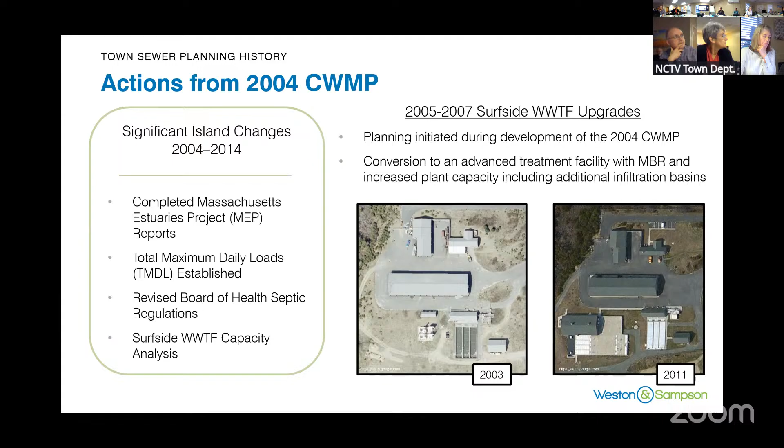So then, based on the results of the MEP, the town went ahead and did a 2014 update to the CWMP, and several modifications were made to these areas. For instance, Hummock North was added as a needs area, Hummock South was added as a needs area, and Miacomet was added as a needs area. That's because the MEP identified nutrient loadings to the ponds, Hummock Pond and Miacomet Pond.

And then, because we had the additional flows, the other change was Madaket. In 2004, the plan was to treat Madaket wastewater at a third wastewater treatment plant. In 2014, the town decided to remove that treatment plant and bring the flows to the Surfside plant instead, so the Surfside plant required an upgrade for the additional flow.

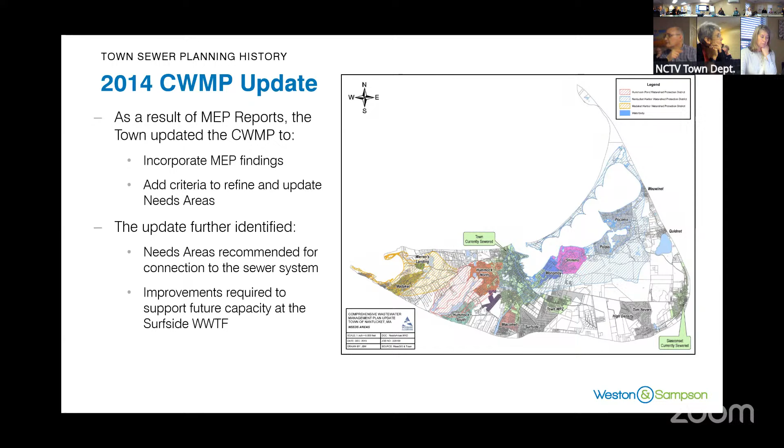Which leads us to our actions.

One of the projects we did was the Nantucket Harbor Shimmo Plus project. That was your first CWMP needs area that got sewer extension. First and only, actually, because no other areas have been serviced yet. That was our first large scale project since the late 80s when we did the Surfside Road area.

Then the bottom left hand side, that was phase one upgrade to the treatment plant. This was the upgrade based upon the CWMP, where we added all those needs areas into the plant. It got updated for the additional flows.

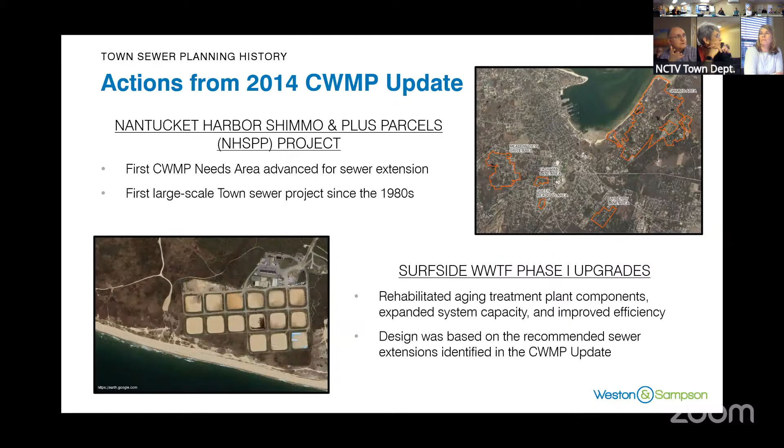The next planning project was the 2020 sewer master plan. We presented this to you folks, and the purpose of the master plan was to identify how and where to connect these needs areas into the collection system. That's a very important step because you need to build the downstream system in order to build the remainder of the system. So we looked at how to connect each of these needs areas into the existing collection system.

Which leads us to the first project that was done, the Surfside Road area sewer improvement project. We have the new pump station that was built, replacing the old 30-year-old station across the street. It's a much larger pump station, but it's basically sized to handle Somerset, Hummock North, and Hummock South. Somerset was the first project to be built, and then we'll follow on with the two Hummocks, North and South. Those flow into Somerset, which then pumps into this pump station, and then to the treatment plant.

So the next action from the sewer master plan was to refine the design that was conceptual in the 2020 sewer master plan. The first needs area that was looked into was the Madaket and Warren's Landing needs areas. This was a priority due to its proximity to Madaket Harbor and to Long Pond. As part of this process, the design of low pressure sewer was verified and some preliminary pipe sizing was completed, as well as looking at different pump station considerations and conveyance options into the existing sewer. From all of that refined design, a budgeted cost was developed for this area.

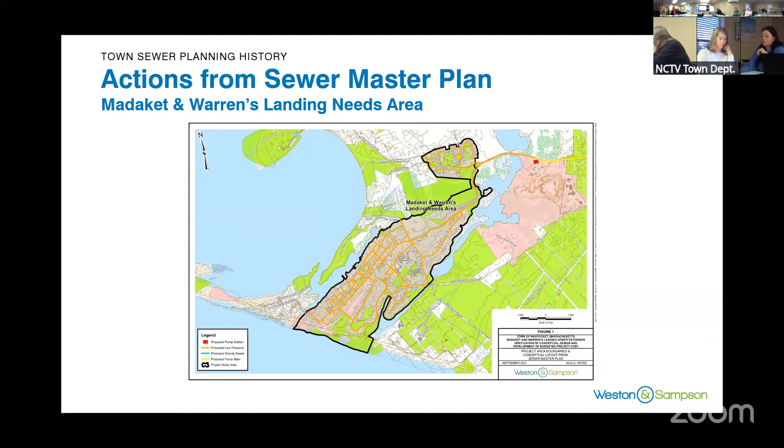After some public outreach efforts during this reporting process, the town decided to shift focus to another needs area to do a similar analysis, and that was the Somerset needs area. This area was chosen as a priority due to being within both the Hummock Pond and Miacomet Pond watersheds, which are both impaired waters, as determined in the 2014 CWMP update. This was completed back in 2023. This needs area needs to be constructed before both the Hummock North and Hummock South needs areas. A budgeted cost was also developed for this needs area at the time.

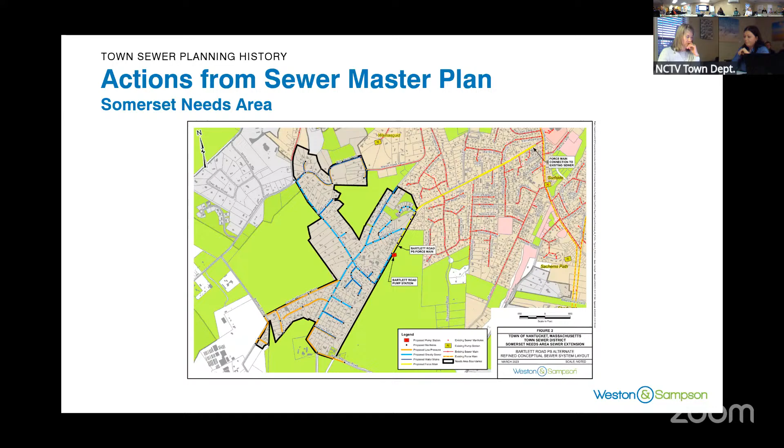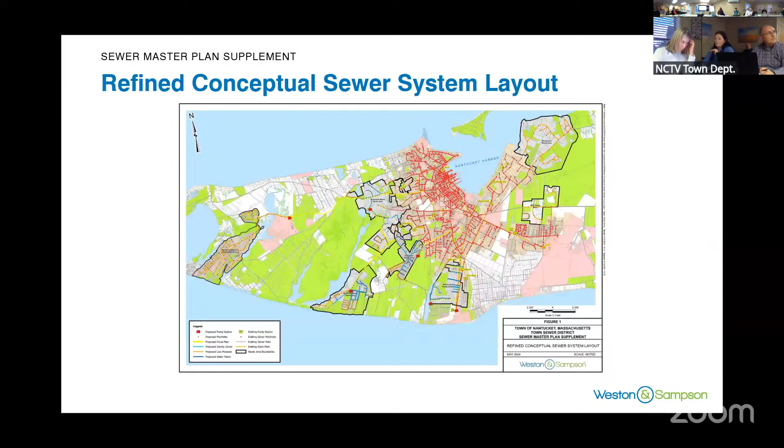Moving from 2023 into 2024, we began discussion of the sewer master plan supplement. After the individual analysis of Madaket and Somerset, the town decided to go through that same similar analysis of verifying conceptual design and developing budgeted costs for the remaining needs areas. That includes Hummock North and Hummock South, as well as Shimmo, Miacomet, and WPZ. I'll briefly touch on each of those needs areas next.

This is a map of the Hummock North needs area. This area is directly adjacent to the head of Hummock Pond, and the majority of the area is within the Hummock Pond watershed. It consists of gravity sewer, low pressure sewer, one pump station, and a force main that conveys flow from the entire area into the proposed sewer in Somerset. So Somerset needs to be constructed first, so these flows can be discharged into the existing sewer system and get treated at the Surfside wastewater treatment facility.

Something to note for this area: at the bottom of the map, there is low pressure sewer proposed and the future Hummock South force main proposed. Something recommended in this report is for those two pipes to go in the ground at the same time, depending on which needs area you construct first, just to save some final paving costs.

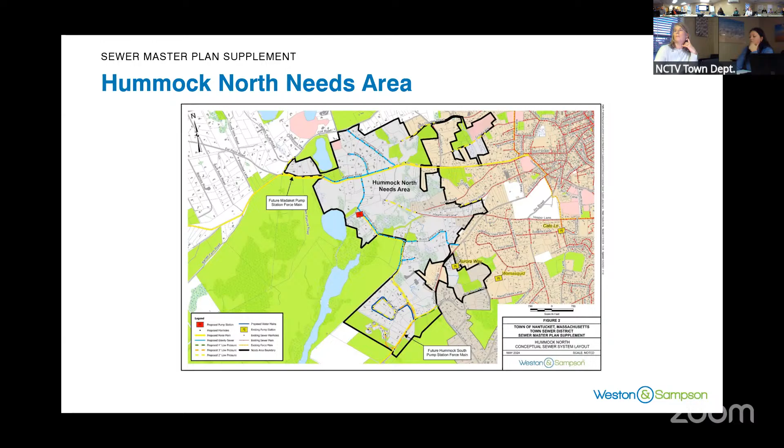So next is the Hummock South needs area. This needs area is similar to Hummock North in that it's directly adjacent to Hummock Pond. The majority is in the Hummock Pond watershed, which is why it was included in the 2014 CWMP and the sewer master plan. It also consists of gravity sewer, low pressure sewer, one pump station, and a force main that discharges into the proposed sewers in Somerset. So Somerset also has to be constructed before this area can be constructed.

Something to note on this is there's a lot of dark blue lines on this map. Those show proposed water mains. While working on this report, we were in discussions with the Nantucket Water Department, and it was decided for this report to propose water mains on any streets within needs areas that don't currently have water mains, to save on possible final paving costs in the future.

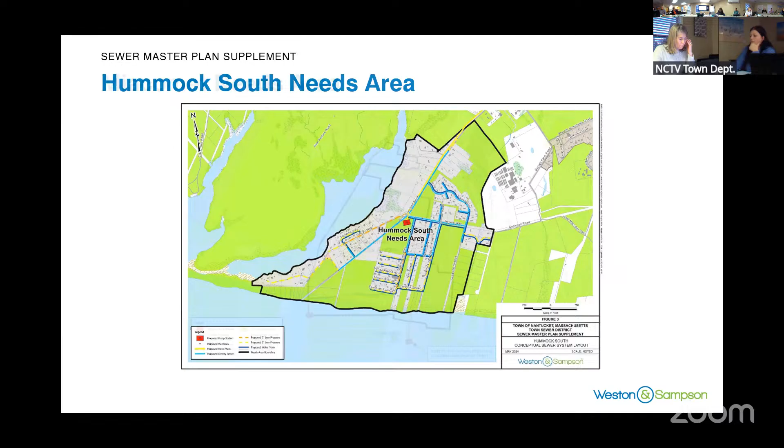Next is the Miacomet needs area. This area was added in the 2014 CWMP due to it being directly adjacent to Miacomet Pond, another impaired water body. This area consists of primarily gravity sewers, with just a few low pressure pieces on Miacomet Road.

Back when the force main was being constructed, it was decided to also construct gravity sewer on South Shore Road. So that used to be included on this map, but now it is existing sewer. There's currently a dry line in the ground, which was done to only pave South Shore Road once. So that line is ready to take in the sewers from this area.

The South Shore Road pump station, which is at the south side of this map, right next to the Surfside wastewater treatment facility, is already in the design phase and is proposed to be installed under a separate project that is going to take in flows from this area.

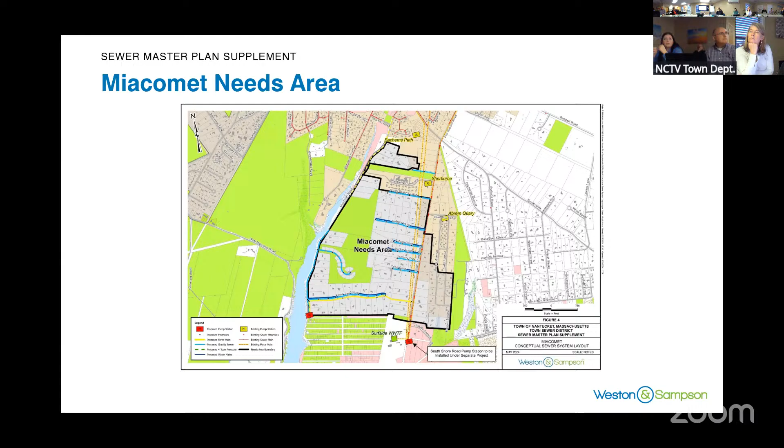The last of the 5 needs areas evaluated as part of this supplement was the Wellhead Protection Zone, or WPZ, needs area. This needs area is tributary to the town's drinking wells. Originally in the 2014 CWMP update, this needs area was shown to be adequately treated just with on-site wastewater or with a septic management plan.

But the CWMP update recommended that if there was ever an issue with nitrogen or other contaminants in drinking water, this would become a recommended sewer area. That's why it was shown for conceptual design in both the sewer master plan and then refined in the supplement. This area is also completely low pressure and has 2 discharge points, one on Hinsdale Road and one on Belvedere Farm Road.

So building on protecting the drinking water on the island, an additional analysis completed as part of the sewer master plan supplement, which wasn't included in the sewer master plan, is the Zone 2 wellhead protection area. The goal of this analysis was to look at the wellhead protection area, outlined in pink on this map, look at all the parcels within this area, see which parcels are sewered, which ones aren't, and see what would need to be done to sewer all the parcels in this area to try to eliminate any septic derived nutrients in the drinking water.

Throughout this analysis, it was concluded that there are over 700 parcels in this area that are currently fronted by sewer, but they're not paying a sewer bill as of December 2023 when this analysis was conducted. So it was concluded that they are not connected. This analysis will have to be rerun since this was done in 2023, and then we can look at the different reasons why each parcel is not connected.

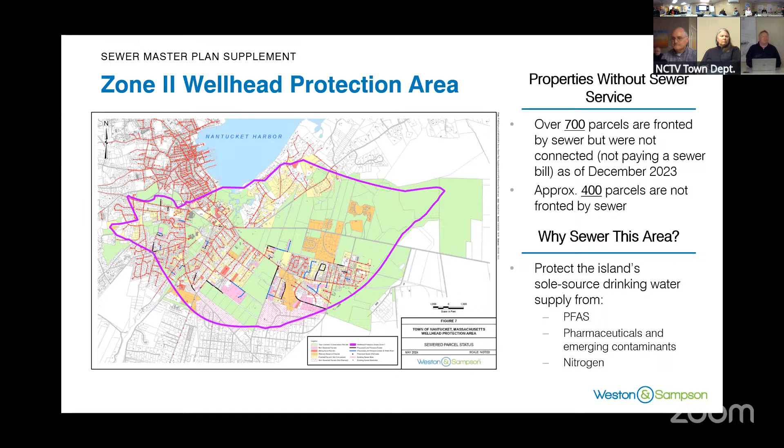This summary shows the budgeted cost developed as part of the sewer master plan supplement for each individual area. The Madaket report was done in 2021 and the Somerset report in 2023. As part of this report, we brought those costs up to 2024 dollars to be consistent with the rest of the needs areas, and for consistency in what we've been presenting to you, the Somerset costs are shown from July 2025.

Something else to note is, as I discussed with the water mains in all these needs areas, they were proposed in all streets in the needs areas that don't currently have water mains, and the cost for those water mains is included in the total cost. So you see how Hummock South is quite large - there are a lot of water mains proposed in that area, and that is where some of that cost comes from.

Now I'm going to hand it over to Kent, who's going to talk about a funding option that was looked into as part of the sewer master plan supplement.

One specific thing we left in the scope when we did the sewer master plan supplement was looking at funding, because funding is always a challenge. It's been a challenge for wastewater projects across the state forever, so it's not new just in Nantucket.

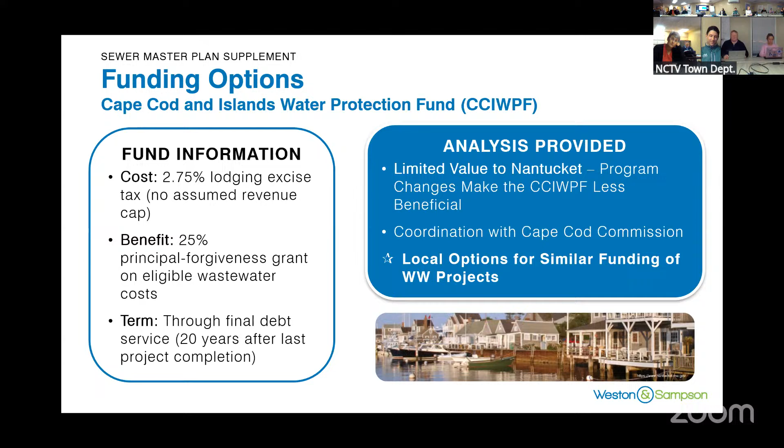So I think, Anna, that was all we had for this discussion for now. We actually designed in a break here because we're going to jump away from the history of the sewer project and where we were, to some of the questions that came up in the last discussion on Nantucket. So we thought this would be a good time to think about what we presented and get back to questions on that.

It was so close, the vote split, I think one vote was positive. It was rejected at the ballot. Yeah, it didn't pass, it didn't get the required votes. As far as I know, the community in Nantucket is still well opposed to what they perceive to be the negative impacts on development should they be sewered.

And then we also have issues around the risk to the infrastructure over time. Nantucket now has some different conditions. For one thing, the cost of the project at that time, 2016-ish, was higher than it ended up ultimately being. And the land where we were going to put the treatment plant is now not owned by us. That went out the window in 2014.

I think Dan and Anna did a pretty good job summarizing some of the previous sewer planning efforts for the town, but I believe pretty much the results of those sewer planning efforts have all corroborated the need for sewers in response to some of the environmental impacts that have been identified in these areas. These are specific to Nantucket's regional environmental impacts, similar to Cape Cod.

Dan touched upon some of the previous projects that have been done. The Shimmo project was the first sewer extension project since the 80s. Then the subsequent projects, the Sea Street pump station, actually set up some of the infrastructure necessary for the next needs areas to be implemented into the sewer system.

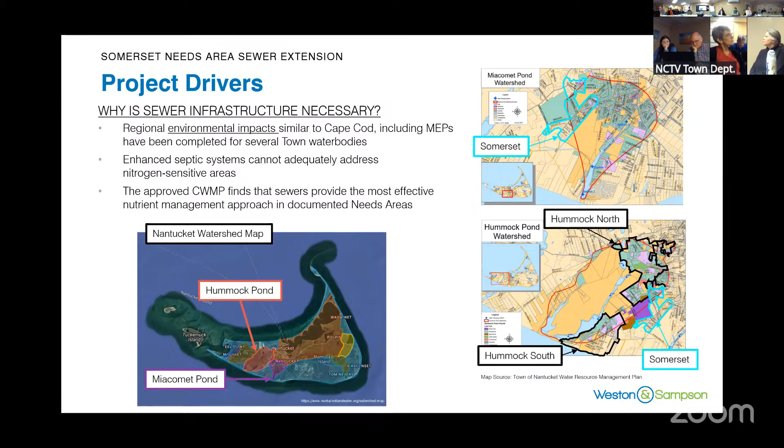The Somerset needs area lies between the Miacomet watershed and Miacomet Pond watershed and the Hummock Pond watershed. The CWMP finds that providing sewers to these areas is the most effective effort to manage nutrients in the area, as documented in the needs areas.

So really, what are the environmental benefits of the sewers? As I mentioned before, the Somerset project area lies between the Hummock Pond watershed and the Miacomet Pond watershed. The MEP monitoring shows that nutrient-driven habitat degradation is really coming from a lot of the septic systems in the area. It's the primary source of the nutrients to these ponds.

As you can see in these pictures of the Hummock Pond and Miacomet Pond, this is just a few pictures of eutrophication and algae in the area. Other items that have been identified are harmful algal blooms, turbidity, and oxygen depletion. Providing sewers to the needs areas will eliminate these septic-derived nutrient inputs throughout the areas.

One big thing to consider is it also removes any PFAS, pharmaceuticals, and other emerging contaminants that are identified in septic systems, really improving the water quality from these areas and reducing the degradation of these ponds.

One question that had been brought up in one of the previous meetings was the need for septic systems in the area and what type of septic system was necessary, specifically the need for a conventional system versus an innovative advanced system.

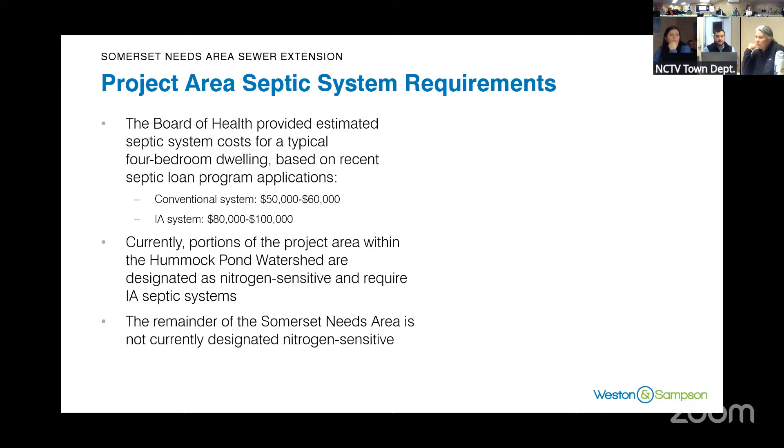In discussions with the Board of Health, we did some research to determine what costs would be for these types of systems. The Board of Health and Wannacomet Water, with Mark Willett, identified average costs of $50,000 to $60,000 for a conventional system, and $80,000 to $100,000 for an IA system.

One option, if you want to click next: the Bartlett Road pump station site currently has a septic system that's in failure. I know people have brought up what we can do to utilize that site in the meantime. Currently there's limited space at that site, and it prevents simultaneous installation of a septic system as well as the pump station there.

The pump station has to go on top of where the septic system is now. Any new septic system installed at that site would essentially need to be removed when the pump station gets constructed, and there would be a temporary loss of wastewater service during construction.

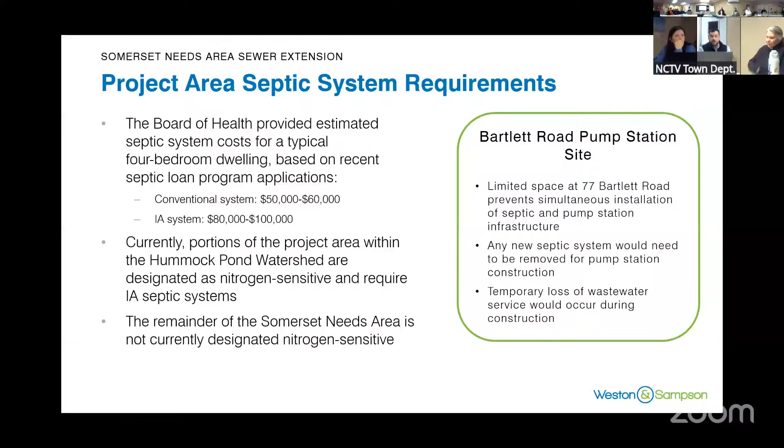Another topic that has been brought up is the potential to split the Somerset project between phases. Looking at it, the logical approach would be to split it into two different phases. Phase one would consist of construction of a pump station, as well as gravity sewers and force mains along Somerset, Bartlett, and Raceway.

This is essentially where all of the roadway improvements are going, the stormwater improvements, and where the force mains are going. Phase two would involve sewer extensions of the remaining streets in the Somerset area.

Now, while this sounds like a good idea, it really isn't recommended. We've touched upon the SRF considerations in the past—really the uncertainty with statewide SRF funding as you move forward, with delays of the project. The anticipated costs and timing delays are pretty big here.

You're going to lose the efficiency of putting this project out as one single project. You risk running multiple construction mobilizations and procurement cycles, and cost variability due to material prices and labor down the road. It really just extends the construction process—you'll continue to have construction seasons go on and on.

I'll pass this over to Ken to talk about some of the project funding. This is a couple of slides you actually saw at the last select board meeting, where we discussed the options of recovering costs from the site.

This is the question of: do you do betterments? How do you get money back? We introduced the history of the last project you did, the Shimmo project, where the intent of the select board and the finance committee was to do betterments for that project.

Town meeting subsequently made a decision on its own to reject the thought of betterments and take that off the table. Instead of betterments, at the end of the Shimmo project, what ended up happening was designing a new sewer capacity fee.

It was a fee made to take the place of the old capacity utilization fee and sewer privilege fee. This new sewer capacity fee was assessed to all the properties out there, and in the end recovered something on the order of 15% of the project costs from those properties.

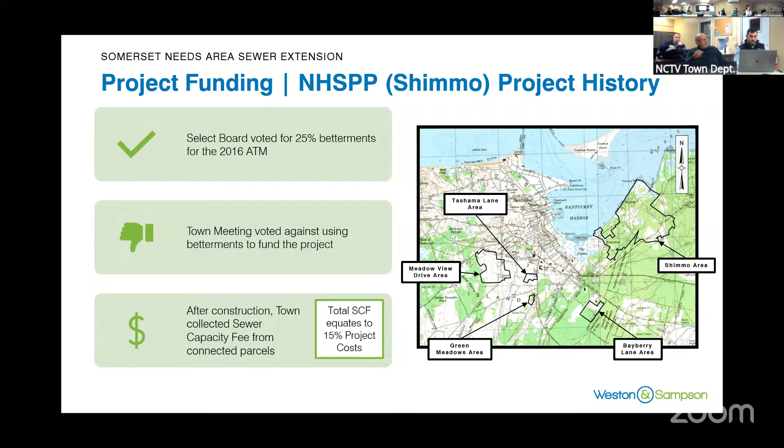As Brian rightly pointed out at the last meeting, this fee is kind of a one catch-all fee right now, technically intended to pay for downstream improvements. So it's not directly equivalent to a betterment, but it is a way you get revenue from the area you sewer directly from connected properties. In essence, it's a fee paid directly by the property served — if they don't connect, they don't pay it.

It is of interest to us — how flexible is it for amount? Right now it's pretty fixed. It's been on your books, David, since 2020. If you go on the website that talks about sewer rates, there's a table that lets you calculate it directly.

Has it increased from 2020 till now? No, it has not yet, but we recommend increasing it a little bit every year.

So in the end, I would never rule it out — many communities doing sewers right now are still doing betterments. What we talked about was, you've got some options. If you didn't do a betterment, like in Shimmo, you could do the sewer capacity fee. If you do that, we strongly recommend you increment it, since right now the fee is a little outdated and also way behind the curve of what actual wastewater costs and the value of wastewater for a property.

Whether it be a new property or an existing property, if you had to replace your septic system, you'd be paying way over that amount — so that's certainly a factor. You could keep the sewer capacity fee and do betterments, or you could do just betterments. There was talk about waiving those fees if you just did betterments, having a policy where if you charge betterments, you could waive the fees.

One of the nice things about the fee we designed for you is that, like a betterment, it does allow apportionment for properties over time. So you've got significant benefits to the property owners charged that fee — even at a higher number, which isn't very high right now, and we'll look at some numbers later, you've got the ability to pay it over time at a reduced interest rate, which is a really nice feature.

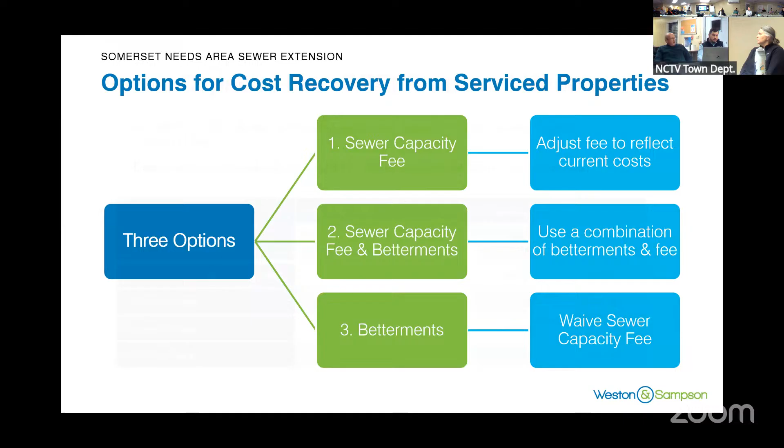Can I ask a question? This would be more for Brian — is there ability to create a program where you waive or reduce the fee for deed-restricted housing? We're doing it now, right? We have a policy on that, ready for deed restricted housing, and it would apply to them. Could we apply it to betterments? No, the policy doesn't apply to betterments — that really has to work differently.

And then generally you can't — it's your sewer permit connection fee or your sewer capacity fee, that's it. Those are the only two things we have on the books.

So staying with the capacity fee, staying with the current thing, gives us more flexibility to incentivize deed restrictions and affordable housing. You avoid the betterment vote, you avoid the whole discussion of the vote, and you can adjust it based on the market.

It costs 2 to 3 times as much to do a septic here as it does on the Cape — 2 to 3 times as much. You get these guys come over and quote, oh, septics are this much, and then when you do the work, they're 2 or 3 times that.

So, I think even if we proceeded with betterments and you continued with the deed restricted policy the way it is, the betterment for the deed restricted house, because it's most likely only going to get one sewer unit equivalent, is going to be at the interest rate, which can be up to 2% more than the interest rate that we're charged on the financing. It's still going to be significantly cheaper than the cost of the septic system, no question.

I have one other question on a slide earlier, if that's okay. A couple back, you talked about the advantages of sewer systems, and you have the picture with the ponds with the green stuff in them—environmental benefits. Are there any studies that talk about the environmental benefits? We know it takes it away, but we've added more ground cover, more roofs, more driveways, more cars parked there, more lawns potentially. Does anyone look at that and say, these inputs are going away but these other inputs are now increased? Has anyone done that kind of analysis?

They do contribute, and there's been a lot of looking at that. One of the interesting things—Massachusetts, I work on the National Water Environment Committee, and I spend a lot of my time working at the national level. Cape Cod is always talked about nationally because it's a very unique situation in the country. There are some parts of Chesapeake Bay that are similar, but for the most part, the nutrient issue on Cape Cod has been very unique. It's the reason Cape Cod took 50+ years to address some of the wastewater issues, because there's been this churning discussion.

One of the reasons the Mass Estuaries Project was done was to study those ponds and look at the inputs. Unfortunately, the answer that comes back over and over, reinforced in the 208 study, is that the real nutrient load you can control is septic. Every time people didn't want that answer and went back and looked, the science said no, we can't control the nutrient load without septic—it's just like all those other things have an effect. There's a lot of things that happen. One of the things that's really bad is surface-applied fertilizers that wash off into things.

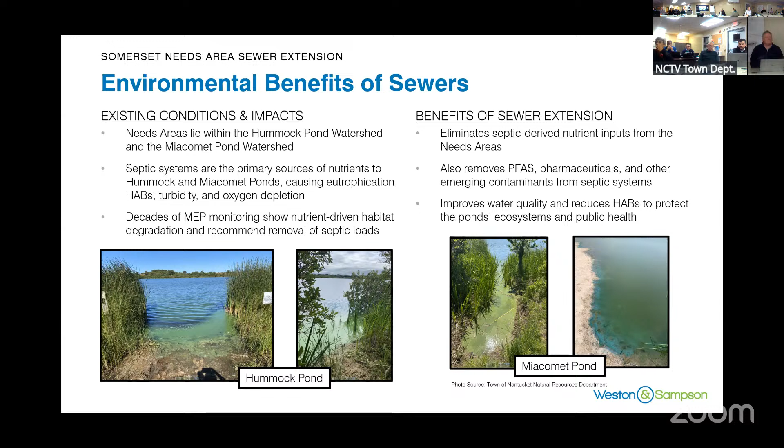One other question, if no one else does. How is the Cape having issues with pools and how are they dealing with it, as compared to us? Pools have become a huge thing on Nantucket, so what are the impacts and what are they?

I don't really know, Matt, that it was a concern about what happens with swimming pools from an environmental standpoint so much. I'm asking about the environmental side. My understanding, I got interested in this when I had my hips replaced about 10 years ago. I had time on my hands, I was sitting and reading about it. I thought saltwater pools were a good thing, like oh, it's great, saltwater. Come to find out, it was creating forever chemicals.

So places that have strict limits on these types of inputs will say that you can't pump those, they have to go into a tanker and go to a treatment plant. Whereas if you have regular chlorine, you can let that dissipate for 10 days or 2 weeks, take a test, and then put that at the low point of your property. But places with saltwater were not allowing it, because it was forever chemicals going into their harbors and into their ponds, disrupting the endocrine system in all the plants and animals.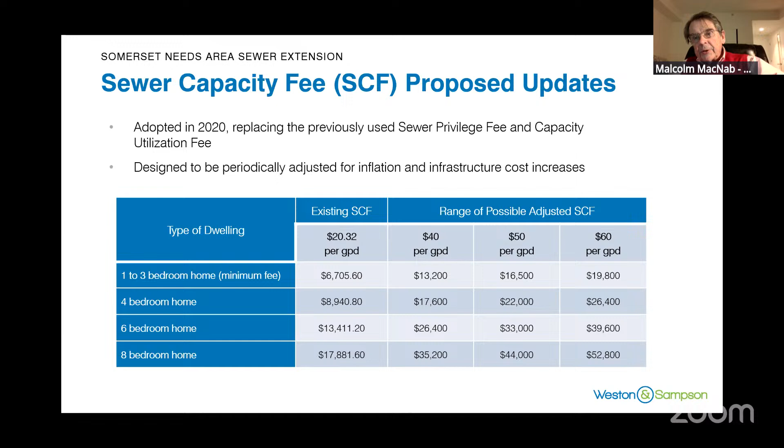Madam Chair, for Matt - the Board of Health did issue new pool regulations about a year and a half, two years ago, and I think the issue again is enforcement and education. I'm not sure we did any education on the subject. On the education side, we had someone pump their pool down Fair Street one day, and all of Main Street smelled like bleach. So it wasn't just something they could do quietly, and I think that's about when the Board of Health was able to change that rule.

In 17 years, I think I've seen 4 tanker trucks show up at our facility to pump out a pool, and we know there's more than 4 pools. Oh yeah, might have been the same guy.

All right, this is our last slide. So this is addressing some of the comments, the questions about build out. So just to clarify, on Somerset, the sewer capacity analysis we did, we've got a proposed 470 dwellings.

This was done with a max lot subdivision under current zoning, and we had 1 additional dwelling per subdivided property. Then we increased the multi-dwelling lots from 41% to 50%. This was done with Andrew Forrest in planning back at the sewer master plan in 2020, and we've been updating it as we move along.

So just for terminology purposes, when we did the master plan, 470 dwellings, a dwelling was basically similar to a house, a building, a home. In the build out study done for the planning department, which did maximum build out for the entire island, a dwelling was basically anything with a bedroom or a kitchen. So that included tertiary apartments. If someone converted their house and put an apartment in the basement, that added a dwelling. You put a garage apartment over your garage, that added a dwelling. So you get a much higher dwelling count.

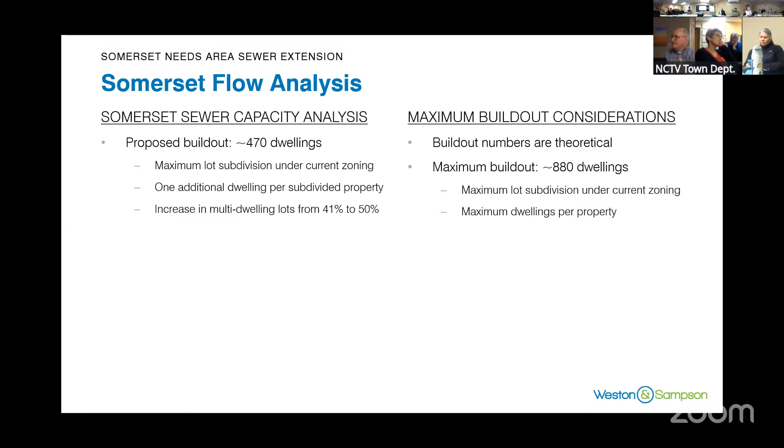Again, that study was a theoretical exercise, not a realistic one. You have a maximum subdivision lot under current zoning and then maximum dwellings per property. It was done island-wide by zoning. So we looked at zoning, not individual lots, not neighborhoods, but island wide. I'll give you an example.

It just looks at the entire island wide by each zoning district. It doesn't do a real lot by lot. In the master plan, we sat down and did lot by lot. Maybe you were there with David and Andrew. We went through all the different lots and said, okay, does this make sense? So we did not count 45 dwellings here. We have 15 dwellings and that's it. You're not going to get any more flow out of that area.

So that's something I take with a grain of salt when you look at that 880 number. Because just by one street, that number 880 is down — take away 30 lots, you're down to 850. That's if everybody maxed out every single possible development. It wasn't Finback, bonus lots, wasn't it — it's like a cluster development.

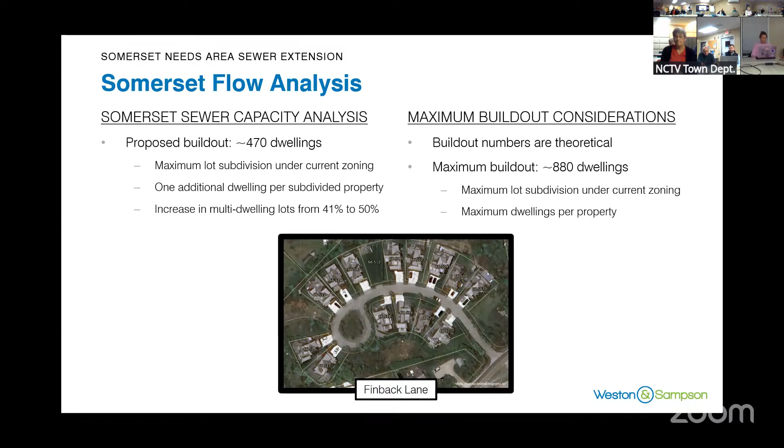So do you all think you have enough information to be properly informed enough to make a decision about this project at your meeting on the 21st? Does it need to be a warrant article and a ballot question? It's really just about where we all are with the context of other capital projects - that's the next layer of this discussion, which isn't on the agenda today, so we'll do it on Wednesday.

For me, this was a great session. I'm glad we had it. It answered a lot of questions for me. It's nice to do the workshop type thing, where we're just talking about one issue.